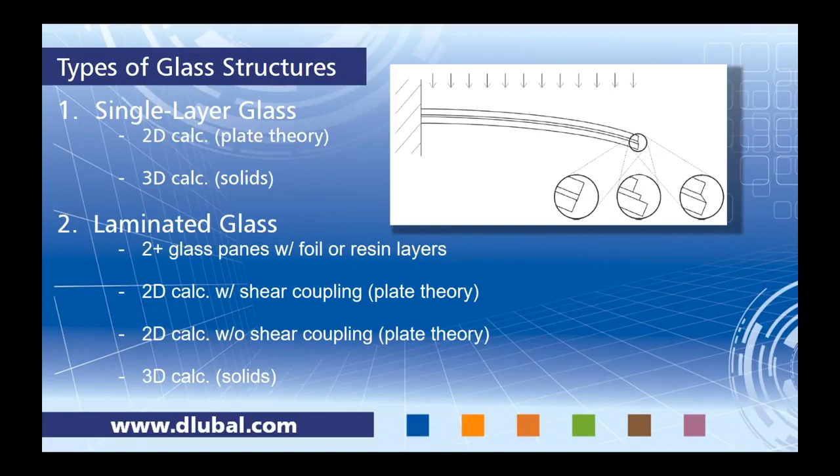The second type of glass is laminated. With laminated, we have two or more glass panes with a foil or resin layer in between. For this option, we also have 2D and 3D calculations available. The first 2D calculation considers shear coupling according to plate theory, and with the shear coupling and the 2D option, we will consider this a rigid shear coupling. You can see that indicated by this picture here, showing the cross-section of the layers and the rigid coupling at the ends. As far as the 2D calculation without shear coupling, this is still according to plate theory, but there will be no relationship in terms of the shear transfer between each of the individual layers, indicated by this second picture here. The third option is with solids. What's nice about this is that we will actually account for the shear stiffness between those intermediate layers to come up with the exact shear transfer between the shear couplings.

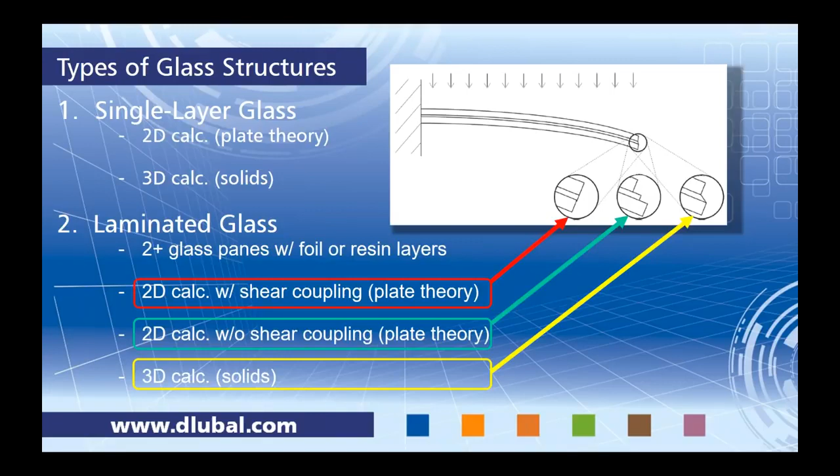When we launch RF Glass, there are two different calculation types we need to choose from: either local or global. Our first example today will utilize a global calculation. This considers the entire model within RFEM, so things like supports, nodal supports, and boundary members are all taken from what we've modeled in the main program RFEM. Now the analysis options for a global model is 2D only, so we can only run this according to plate theory with a linear analysis. Something like insulated glass would not be available for a global calculation.

The other calculation type is local, where we will actually be looking at an individual glass surface only. Things like support types and boundary members have to be redefined within RF Glass, and this provides us with the opportunity to get more detailed when it comes to the support types, where they're exactly framing into the surfaces or solid elements. For local, we also have the ability to run either a 2D or 3D, plate theory or solid, which further allows us to run a linear or large deflection analysis. This will be our second example today, utilizing the local calculation.

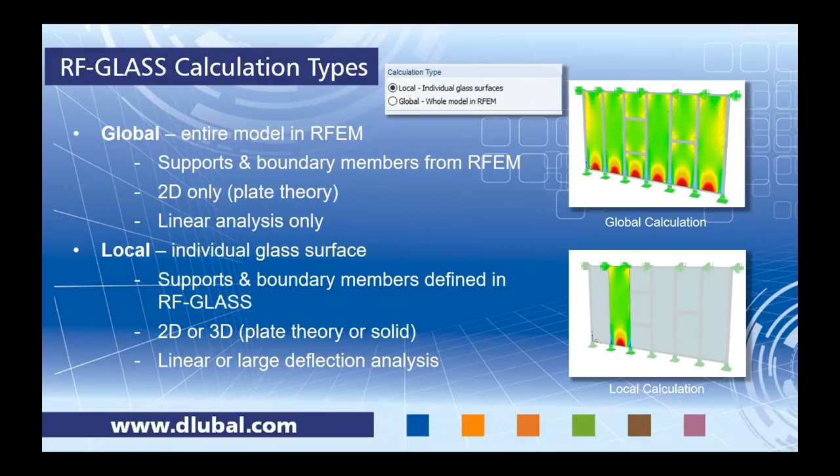I did want to touch upon the NCSEA putting together a new design guide, released this year, called the Engineering Structural Glass Design Guide. To phrase it exactly how they phrase it within the design guide itself, it's to collate relevant design references, requirements, and analysis methods into a single source for easy reference.

I believe that when it comes to glass design within the US, it's a little bit difficult because unless you're an expert, there's really no clear-cut design path to take with glass. So what NCSEA took upon themselves is to compile this document, and it's not very long, to compile maybe some theoretical literature along with what we do know within the US, according to ASTM design guides as well as Eurocode references, so that engineers with not a lot of experience can relate to this design reference. I did want to touch on Chapter 6 with finite element analysis.

This design guide states that, of course, we can always run hand calculations for glass design. But at some point these models may get a little too complex, so that's when we should turn to a finite element analysis software. They also refer to global and local, but this is a little different terminology than what I just discussed with our global versus local.

Okay, so we are finally ready to jump into our first example. It's quite common with glass design that we want to integrate it with our own custom extruded sections. These aren't sections you'd find within the AISC or the ADM, but rather some type of unique cross-section. Within RFEM, you most likely won't have access to quickly define this cross-section without manually calculating all the properties. So we've created a program called SHAPE-THIN.

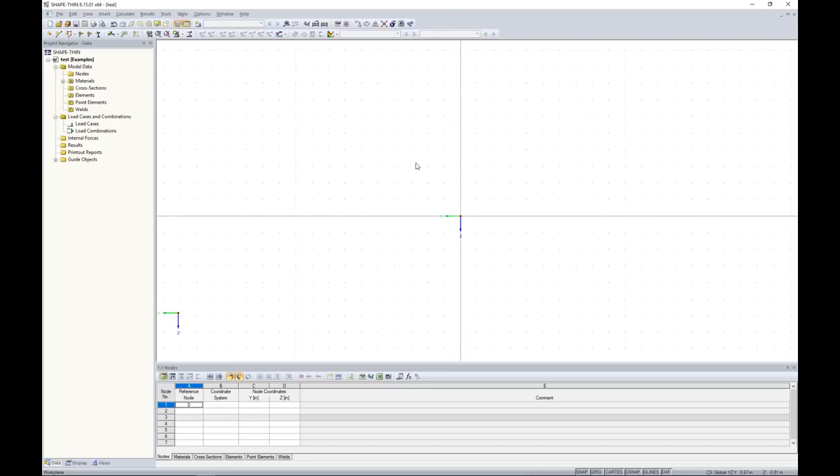For those of you familiar with RFEM, the interface looks almost identical, which is nice for familiarity. What we're going to do today - you can import an AutoCAD file, but today I'm just going to draw my cross-section and have the program calculate the cross-section properties that I can later bring into RFEM.

So we'll start off with a new polyline. With this polyline, I need to define the thickness of my cross section, so we'll set this to something fairly thin at 0.15 inches. As I draw this polyline, I can also take into consideration a bend radius, which you can set here. We'll choose 0.04. The material must also be specified.

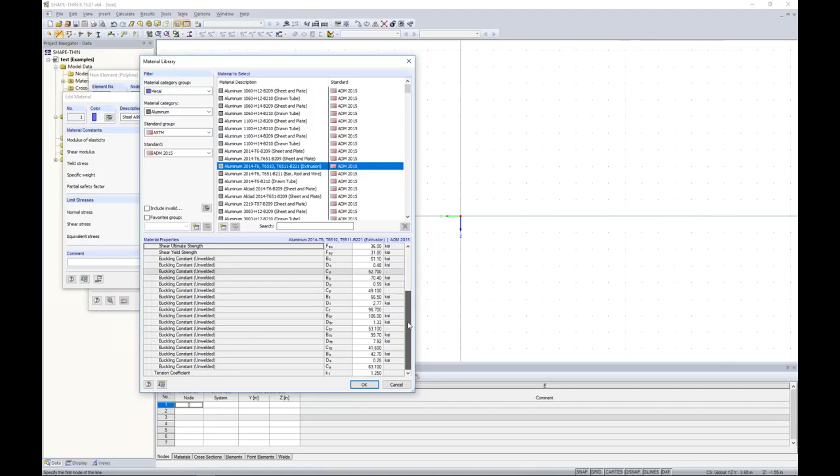Steel A992 is probably default when you first launch the program. We can enter into our material database and use our filters on the left. So instead of steel, maybe we drop down to aluminum, take a look at ASTM, and further filter to the ADM 2015. Now you can see the long list of all the aluminum materials, so most likely you'll find what you need. Today we'll take a look at T6510 for extrusions, and here are all my material properties. I can click OK through these dialog boxes.

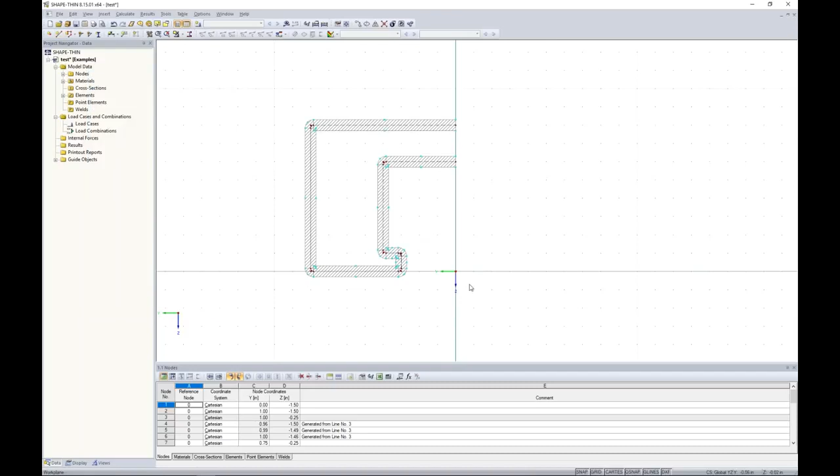So now I'm taking a look at my graphical interface, and I can begin drawing my cross section. All I'm doing is snapping to a few various points on my drawing grid, and you'll notice that bend radius is taken into consideration when I turn these corners. Now I'm only going to draw half of the cross section because I can utilize some of these AutoCAD type features that make our lives a little more efficient.

So I can select the left side of my cross section and use my mirror tool. Up in the tools is the mirror option where I can create a copy and mirror about the origin. I click OK, and just like that, a fairly simple but custom extruded section is created.

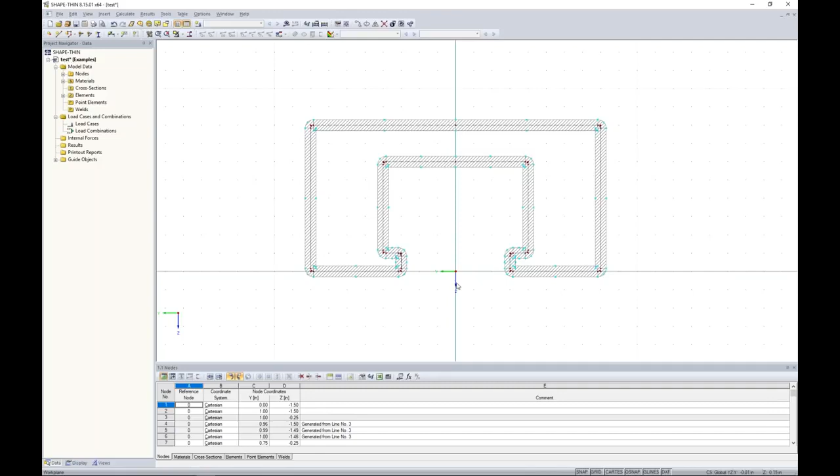I'm almost ready to run the analysis to get my cross-section properties, but I want to jump to materials. For aluminum, you'll notice that the yield strength is automatically set to 0. If I try and solve this, I'll get an error. The reason, if we take a look at the aluminum material, is that there are different yield and ultimate strengths depending on if we're looking at tension, compression, or shear. So the program simply doesn't know what to use when calculating the plastic cross-section properties.

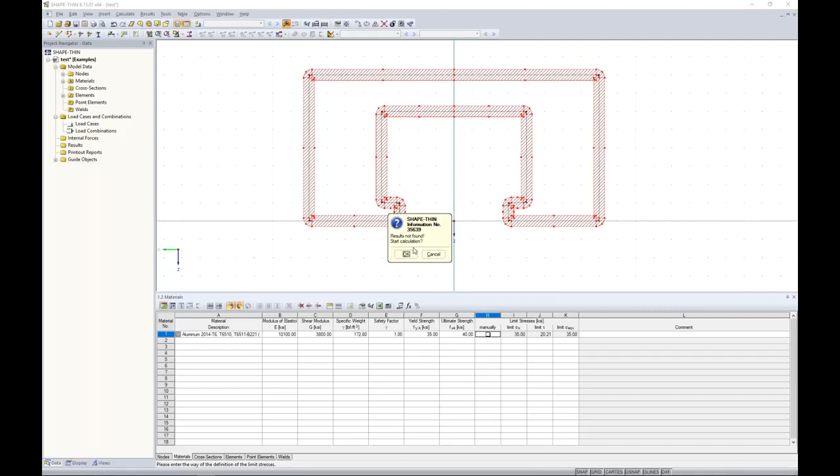So I can realistically set this to whatever, it doesn't matter, 35 and 40. The reason is because I'm going to redefine the material once I get into RFEM. So for now, just as a placeholder, we can now run the calculation with that applicable yield strength set in there. In just a second you can see it solves pretty quick.

Now available in my results table are all of the cross-section properties for this custom cross-section. So we want to save the results, and you have to save the results with these calculated cross-sections in order to integrate it in with RFEM.

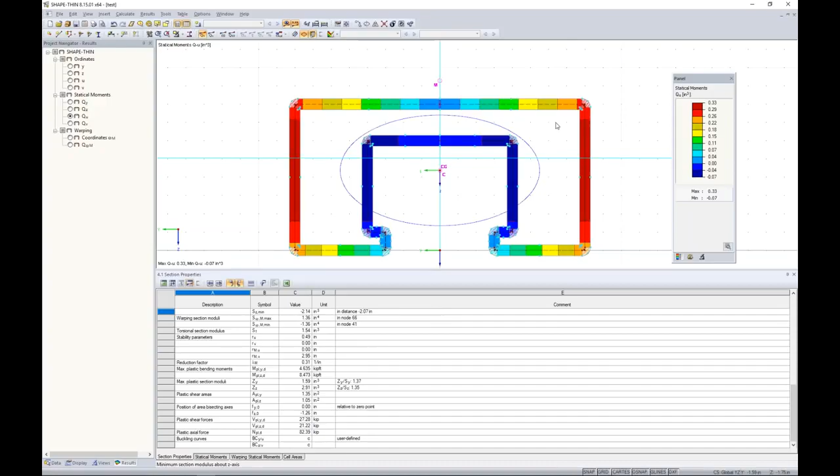So now changing programs here, we'll go over to the program RFEM. To begin with, I need to create a model name. For this one, we can call it webinar. Now, the type of model is 3D.

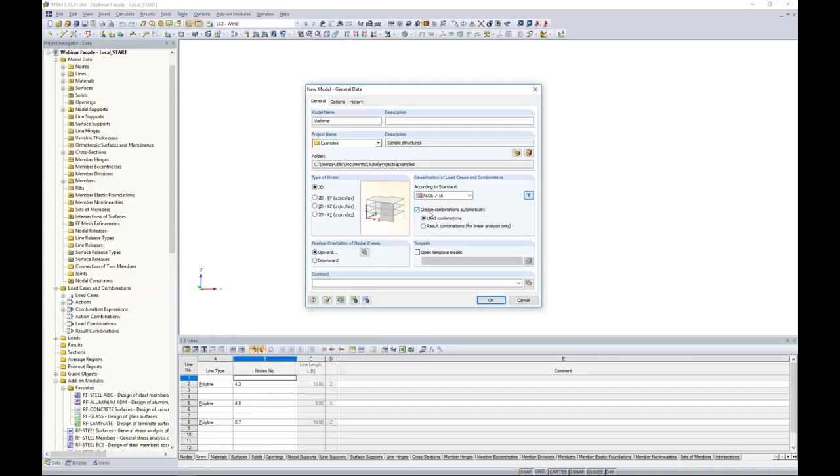The load combinations - this is where we can set the automatic load combination generator according to the ASCE 7 2016. We also have the NBC 2015, as well as many other international standards, including older standards if we hit this button here. When this checkbox is checked, it will automatically create those load combinations. When I uncheck this, that allows me to manually define load combinations. For today, we'll go ahead and utilize the program generating these for us. I click OK, and then up pops my new file.

So here's my graphical interface that we'll utilize to begin modeling our facade wall today. We also have our tables down here at the bottom to work with. You can import and export directly to and from Microsoft Excel. We'll certainly be utilizing these quick tools up at the top.

Over on the left is our project navigator, maybe a little bit more unique to our program RFEM. As we begin to model here, all of our input data will be available in these tree-type lists. The results will also be available here.

So what I'm going to do is change around my drawing grid to begin drawing my facade wall. I want to start off with a new member, so I click on my new member tool. The member type is set to beam, and I'd like to take a look at my cross-section library.

Here are all of my cross-sections available. This would include shapes from the AISC, from the CSA, from the ADM. You also have these parametric thin-walled sections here, but you'll notice that I don't see that custom section that I just created. It's not an option to choose from.

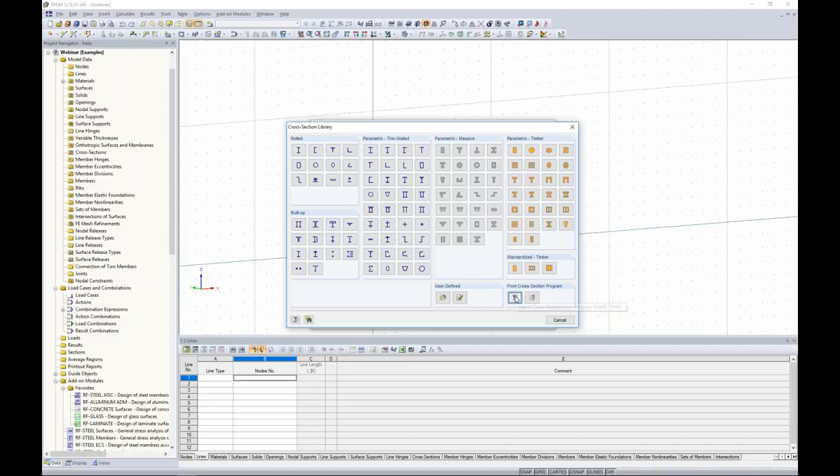So that's why we're choosing this option down here to import the cross-section from Shape Thin. I just simply navigate to where I saved that file, and there's my custom cross-section available to me.

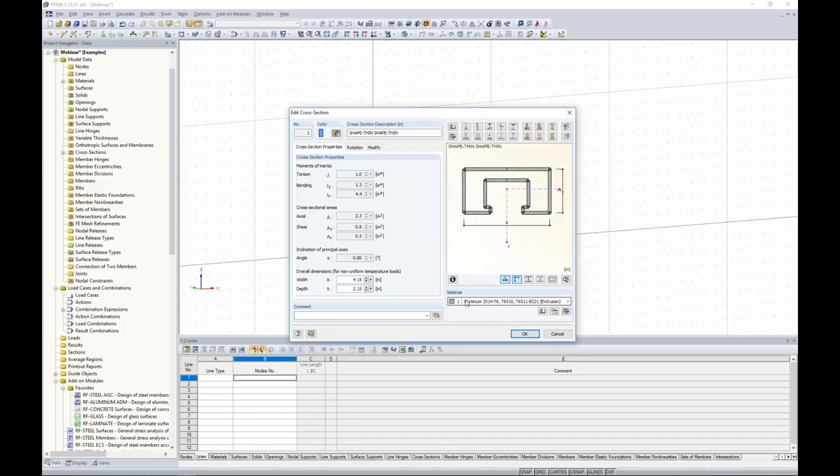So once I load this, I can also modify the material here. Perhaps this was set to steel A992 or whatever default material was in the program. Well, we can quickly access our material database here.

Again, this looks familiar. This looks like exactly what we saw in Shape Thin. We can filter on the left to the ADM 2015 to choose our T6510 for extrusions, and I click OK. So just like that, we now have this custom cross-section available to us within our main program, RFEM.

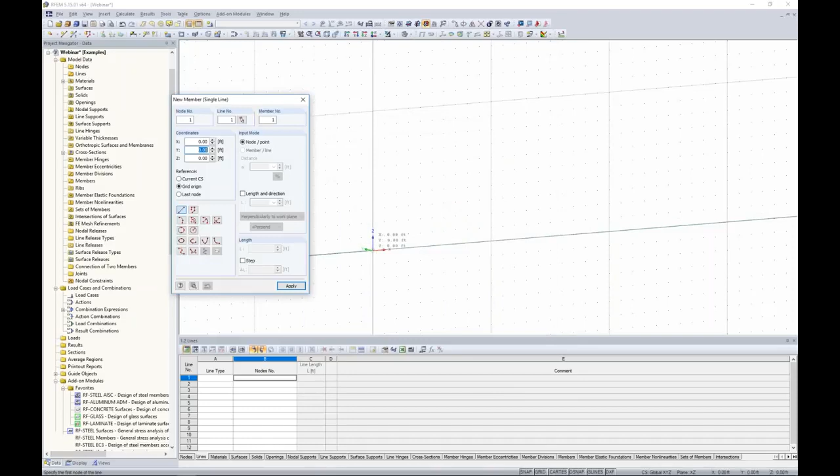So all that I'm doing here is just snapping to a couple points to create my boundary members for my first glass panel. Once I'm done with that, I've created these 4 members, and I want to draw in my glass panel.

Well, we can do this with a new surface element. Up in my quick tools, just like how I drew the beam member, we can draw a surface element. You'll see here we have multiple surface shapes, but for today, we're just going to utilize a typical rectangle shape. Now this is where we choose the stiffness from our drop-down menu set to glass.

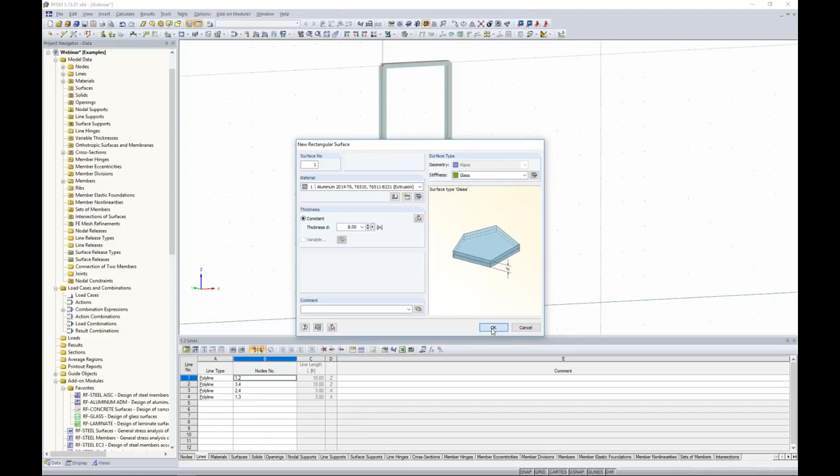As far as the material and thickness, this doesn't matter. We're going to override this in just a little bit of time with the RF Glass add-on module. So aluminum, steel, concrete doesn't matter. Thickness doesn't matter, that's just another placeholder. What we can do is just snap from one corner to the other, and then that 2D surface is drawn for us.

Let's also say that we would like to release the moment of this glass panel framing into these boundary members. Maybe it's not a typical connection type to transfer the moment from this surface element to those boundary members and vice versa. So how do we do this?

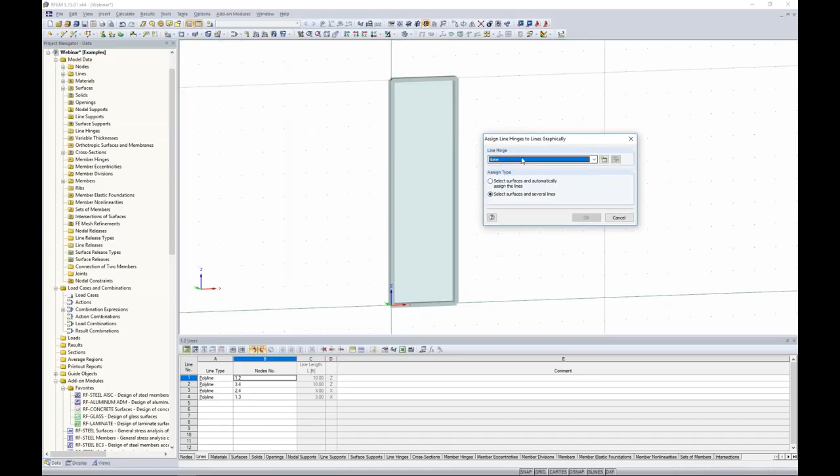Well, under Insert and Model Data, we have the option for what's called line hinges. I can assign to lines graphically, and up pops my dialog box. Right now, I don't have a line hinge definition, it just says none. So what I'd like to do is create a new one.

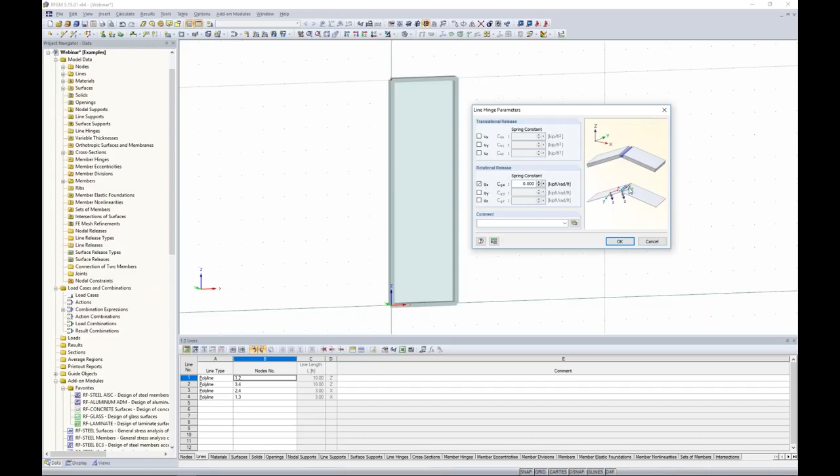So here are my 6 degrees of freedom for my local axes according to my line. Now this is not the local axes of my surface, it's not the local axes of that beam, but it's actually the shared line that they have in common. So what I want to do here is release the moment about the local x-axis of the line, which is along the line length, and I click OK.

So now I can select this surface and then easily click on the 4 line elements on the boundaries, click OK, and now we can see the line hinge shown here with this available symbol.

I am going to select everything here, just like what I would do in AutoCAD, for example, and use my Move Copy tool. I'm going to create 5 copies in the displacement vector of 3 feet in the global X direction. I click OK, and now it copied over the line hinges, the boundary members, and these surfaces.

Well, I've decided that for this 3rd panel and this 5th panel, if I hold down my Control key, highlight them, and I hit Delete on my keyboard, I want to subdivide these into smaller glass panels.

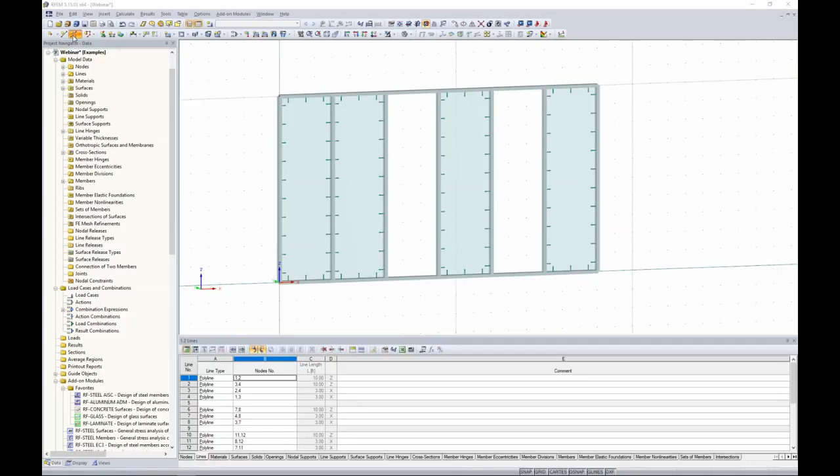Well, for this, I want to draw a new member again. Now, my Shape Thin section, along with my material aluminum, has already been set. I don't need to redefine that, so I'm utilizing the same shape and the same material. All I need to do is click OK, and then I can begin modeling here to create some smaller glass panels.

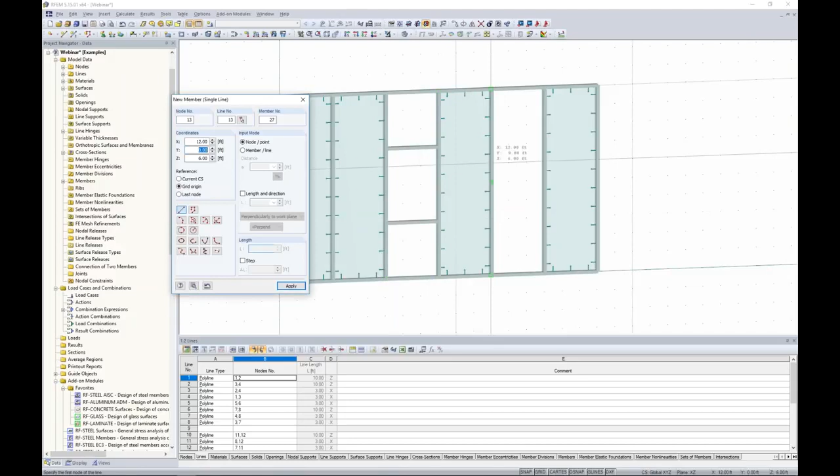And we'll go do the same over here, but we'll just subdivide this one in half, and I can right click. Now I'm going to utilize this tool up here to connect all of my lines, and that just creates a node here and separates these members.

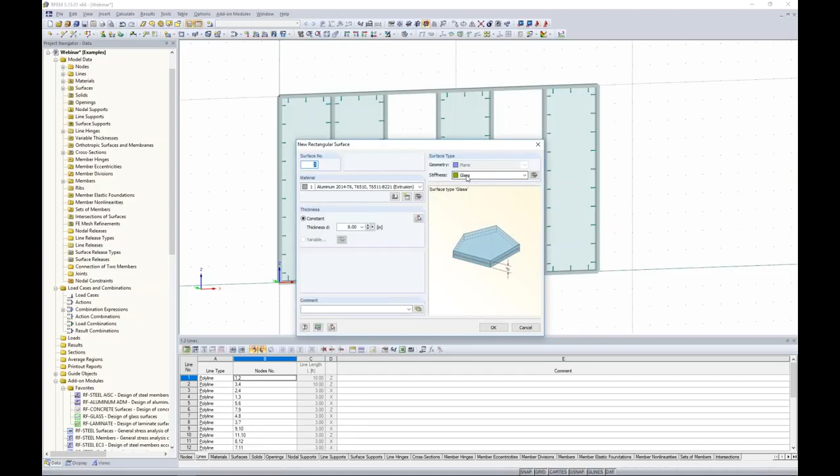Now you'll notice that I obviously lost my glass surfaces, so we want to go back to draw a new rectangular surface, set the stiffness to glass. Remember, the material and thickness don't matter at this point, we're just really defining the geometry at this point. So snapping from one corner to the other, I can quickly take into consideration these smaller glass elements.

Now I've also lost my line hinges. So under Insert, Model Data, Line Hinges, assigned to lines graphically. We've already defined the type, I don't need to redefine that. All I want to do now is to select this glass panel and select the 4 boundary members.

And I need to do the same thing for all of these new glass surfaces. So you can see the benefit here of utilizing that Move Copy tool so that we don't need to individually apply these line hinges to each surface like we're doing now for these smaller segments. So we'll go ahead and do the same thing for the 5th panel point location, and finally for our smaller panel here, we are done.

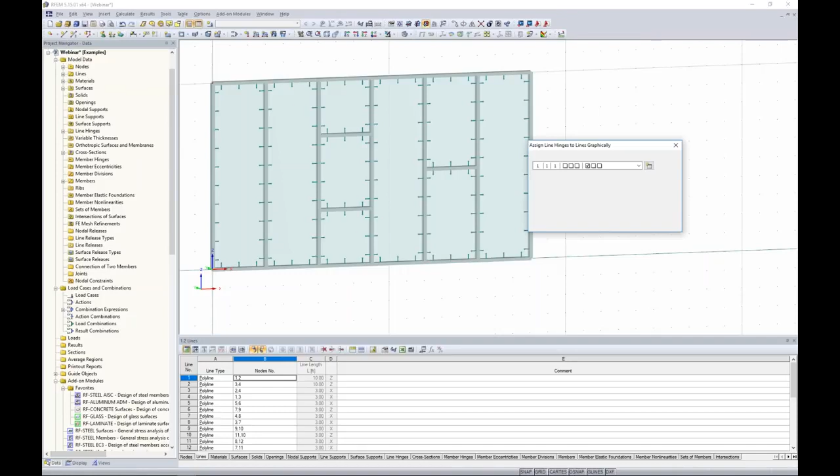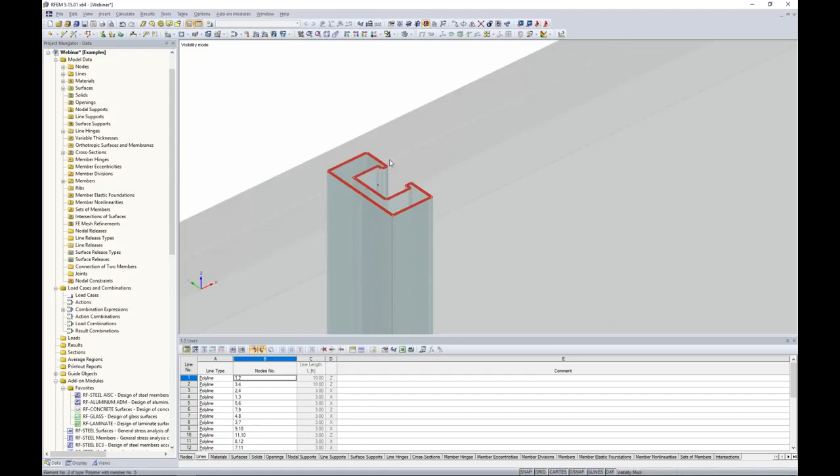Okay, so the geometry is pretty much accounted for, but there's one thing I'd like to adjust. If we take a look at this member here and I choose a visibility by selected objects and I zoom in here, well, number one, you'll notice I get a great rendered shape here of my cross section. Although it's custom and we might have some different lips and extrusions and whatever else, you'll always get a nice rendered view, so I know exactly where the orientation of my members are.

Well, for these internal members, I actually want to rotate them 90 degrees. Maybe that's just the type of connection for this facade wall. So canceling out this visibility and rotating this around, let's turn this into wireframe view, and I'm going to select all of my internal members here. So I didn't select the outside boundary members, I just simply double click on one of the members, and then right away I can adjust the angle to 90 degrees and I click OK. So now when I turn back on the rendered view, all of these internal members are now facing towards the global y-axis.

So we would like to support this wall. How we'll do so is with nodal supports, and again, it's just a simple tool up here, a new nodal support. Now we have a couple default options here, hinge, which is a typical pin nodal support, and rigid, which is fully fixed nodal support. So for the bottom of the wall, let's just utilize a simple pinned application. I click OK. I just highlight along the bottom of my wall here, and I lost it, so 1 second. I highlight the bottom of my wall, and now that pin support will be applied to every node along the bottom.

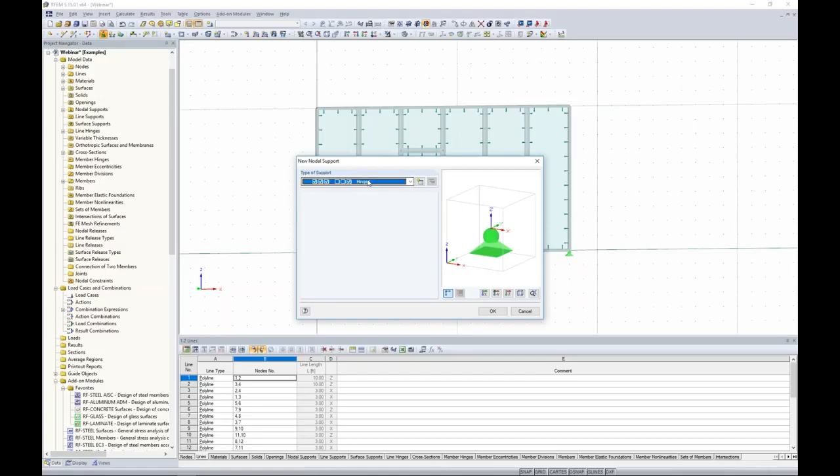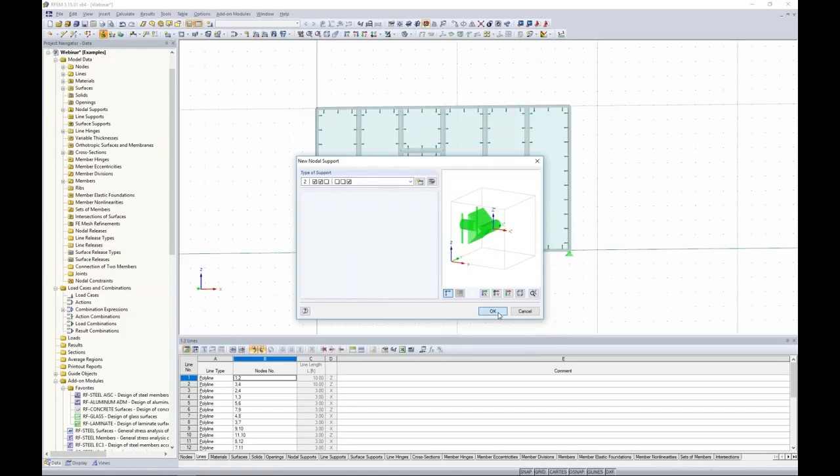As for the top, I also want to apply a nodal support, but this time I don't want to use one of these default options. I'm going to create my own nodal support. Here are my 6 degrees of freedom, 3 degrees in translation, 3 degrees in rotation. I'm going to release translation in the Z direction, so I want this wall to have a roller type support in the vertical direction. I click OK, so now I have this user-defined type of support. I click OK, and I can highlight the top of my wall here.

So realistically, the modeling of the wall itself is complete. So we want to move on to applying a couple loads to this wall. For this, we need to first define our load cases. So another button up here in our toolbar called New Load Case, and up pops my Edit Load Cases and Combinations.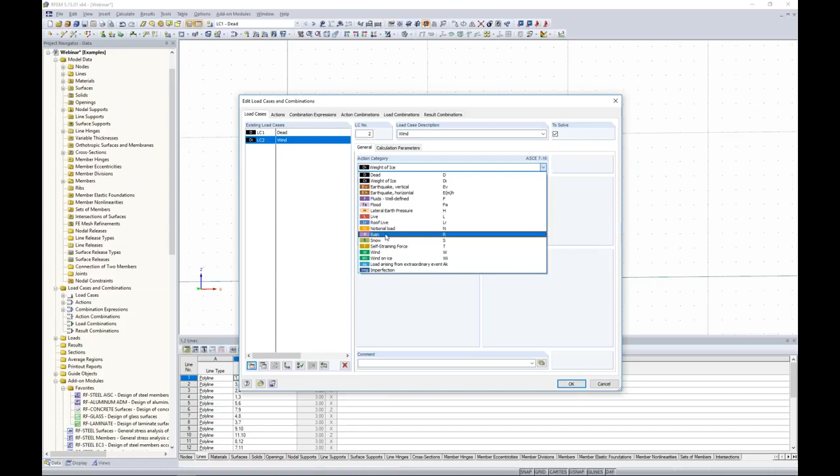The first load case is going to be dead load. Now the action category is important because this tells the program what load factors should I apply according to the ASCE 7. So this one will be according to the dead load, and self-weight is automatically activated here. For my second load case, we will call this one wind. The action category will be set to wind. Self-weight is not activated here because we don't want to account for it twice.

The combination expressions tab is the program telling me it's going to generate all the LRFD load combinations and all of the ASD load combinations. To see these individually listed out, let's go to the load combinations tab, and here are my 3 LRFD load combinations and my 3 ASD load combinations.

This is a fairly short list because we only have 2 different load cases defined. So once I'm done setting up my load cases and load combinations, I need to actually apply a load to this wall. To apply a load, we can see these load cases and load combinations generated for us here.

Let's make sure we're in the LC1 dead load. For dead load, I'm going to make the assumption that I only want to apply self-weight here. Remember, that's already accounted for within the load case itself, so I don't need to do anything further.

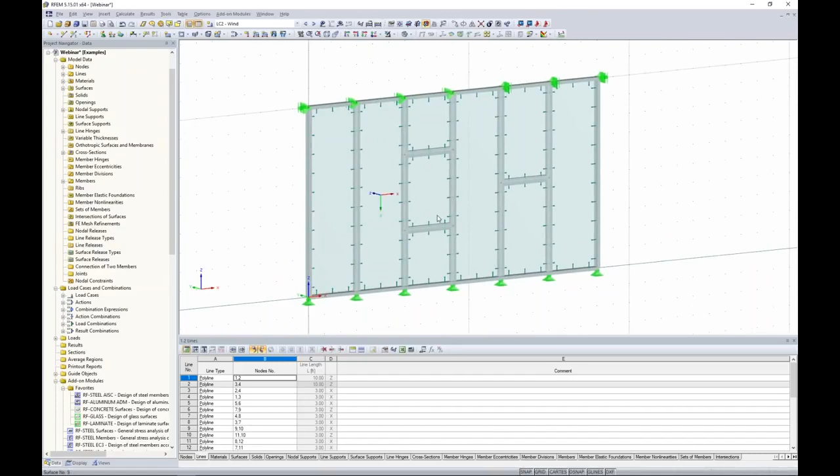As for wind load, I scroll to wind load, and I want some type of surface wind load acting on the face of this wall. So I'm going to go to a new surface load, apply a force, and the load direction is going to be in the global Y direction. You can see here my global axes, and I want this load acting on the face of this wall. The load distribution is going to vary in the vertical direction.

What do I mean by that? At the top of the wall, I would like the magnitude to be something around 25 PSF, but at the bottom, let's decrease that slightly to around 20 PSF.

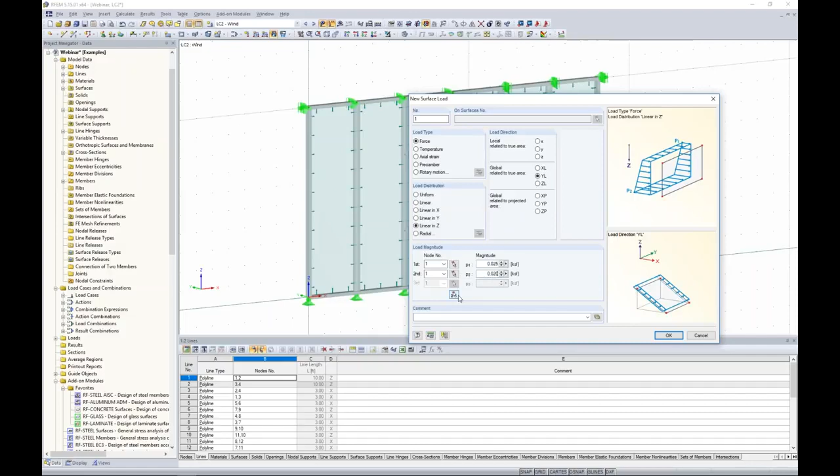The thing that I do need to define is to tell the program what's the top of the wall, what's the bottom of the wall, and how I want to vary this. That's easy enough to do by just choosing any arbitrary point first at the top of the wall and a second point at the bottom of the wall. Now the program knows what magnitudes to associate at which points.

I click OK, and then I just simply highlight my entire wall. And just like that, we have our wind load applied to the surface here, which is varying in the Z direction. So pretty simple for our loads being applied today.

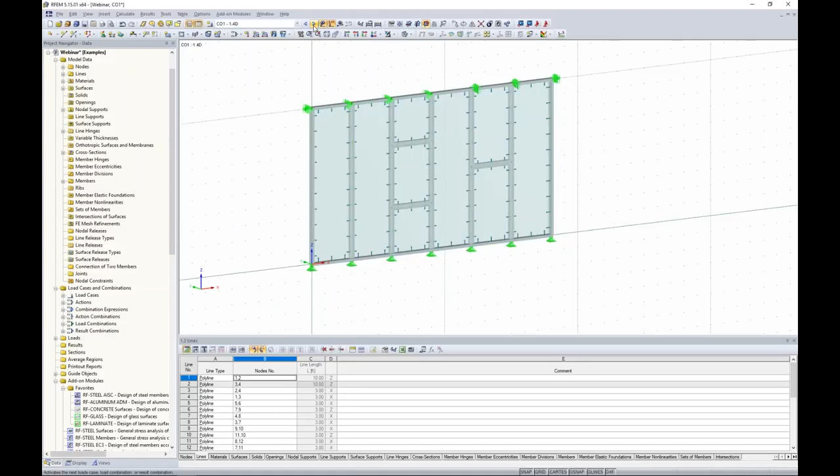We can see the load combinations here with the load factors applied for dead load and wind load and so on. So one final thing to do before we jump to the RF glass add-on module, and that's to take a look at our finite element mesh.

Well, these are surface elements, so we want to take a look at the FE mesh settings to make sure we're going to get accurate results. Under Calculate FE mesh settings, the global FE mesh length is always set to 1 foot for a new file or a new model within RFEM. Let's leave it as the default, and here I'm going to regenerate the FE mesh once I click OK.

I can see here that my FE mesh is a little bit too large. I only have 3 FE mesh points along the width of these glass panels. This really just isn't ideal to give us accurate results, so it's always suggested that we go smaller than this. This will increase our solution time slightly, but in turn, of course, we need to see accurate results.

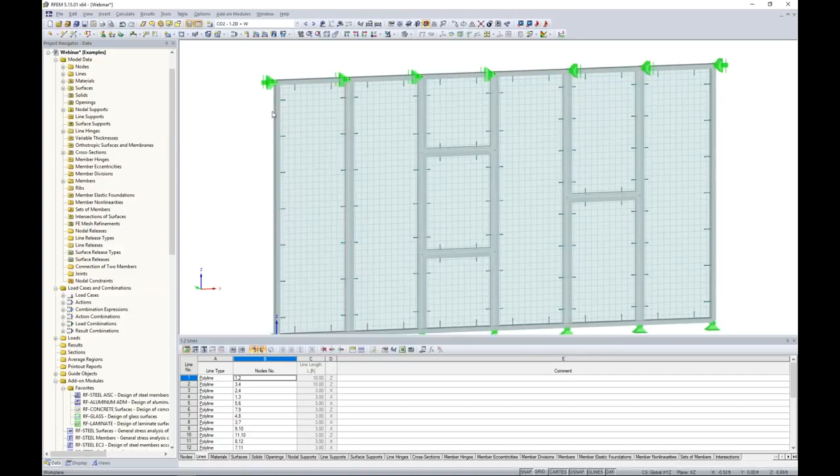So under Calculate FE mesh settings, let's try something like 0.25 feet, and we can regenerate this again. This looks much better, and I know that's a little difficult to see, but maybe we turn this into wireframe view. We can see the FE mesh settings along the width is much smaller, so that looks much better.

Okay, so the geometry, the loading, the FE mesh, everything's done, but remember we still have these glass surfaces here. So this is where I want to launch the add-on module RF glass. Everything you've seen up until now was in our main program, RFEM.

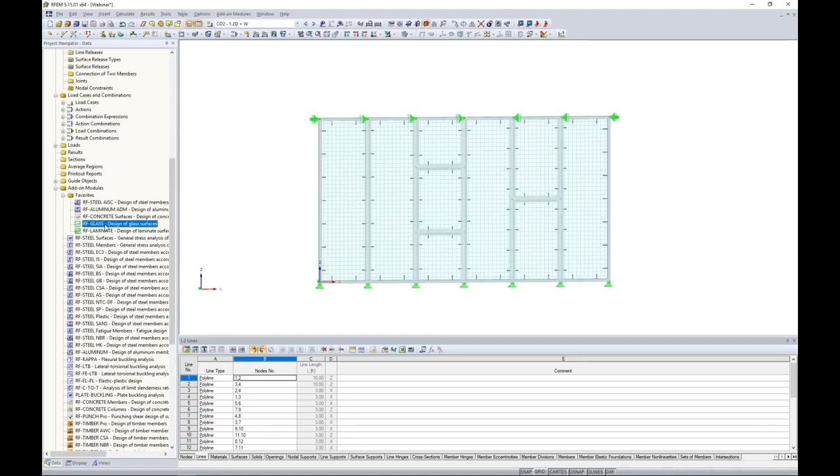In our project navigator, here is our long list of add-on modules, and as you can see, RF glass is one of them. So we can launch this add-on module, and up pops nothing more than a dialog box. As I mentioned within the PowerPoint, we need to first choose the calculation type, and for this, our first example, we're going to utilize the global calculation.

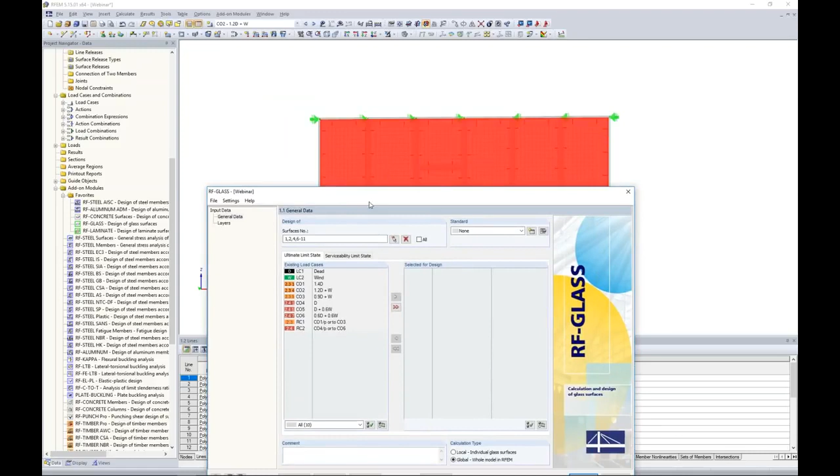The standard is set to none because we're just doing a stress analysis and design. These surfaces that we're designing for, you can see they're all highlighted here because they're all being selected for design, but by all means, you don't need to choose every surface if you're not interested in it.

For the ultimate limit state design, we'll choose our 3 LRFD load combinations, and for our serviceability, we're choosing our 3 ASD load combinations. As I mentioned, we can also check deflections.

Then it's as simple as just working down this list from top to bottom. So we move on to the layers, where we define our different glass layers. The first thing to do is to select the surfaces that this first composition will apply to, so I can highlight them all, and you can also create more than one composition.

So maybe for these smaller panels, I wanted to use a thinner glass. You could certainly do so all within the same model by assigning different surfaces to different compositions.

So we're going to utilize laminated glass. The first layer type is going to be glass, and here is where we would access our material library.

Typically when you launch this for the first time, you're really only going to see a very small amount of materials that aren't really relevant for the ASTM or the US market. So this is why we give you the opportunity to define your own. For me, I've created a thermally toughened float glass and placed it in what I call an ASTM glass standard. So depending on the manufacturer, or if you're going off of the ASTM standards, you would simply add that material here with this option to create a new material, put in your material properties, and that will always be available for all file types when you're modeling in RFEM.

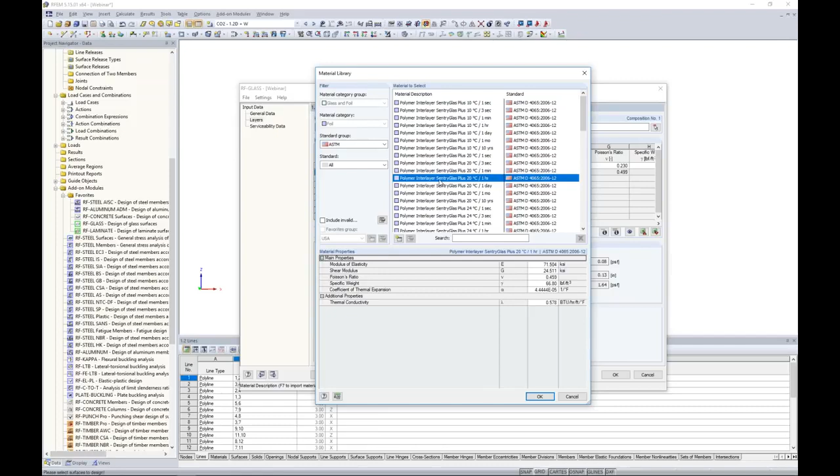The second layer is foil. When we go to the material library for glass and foil, we can see here that we have some options that are not related to any standard, like PVB would be a common interlayer, for example. We do have a manufacturer here for SentryGlas according to the ASTM, and by all means, you can always add your own interlayers as well, whether that's a foil, a resin, PVB, and so on. So for today, we're going to utilize SentryGlas at 20 degrees Celsius. I click OK, and the thickness is much smaller at 0.01 inches.

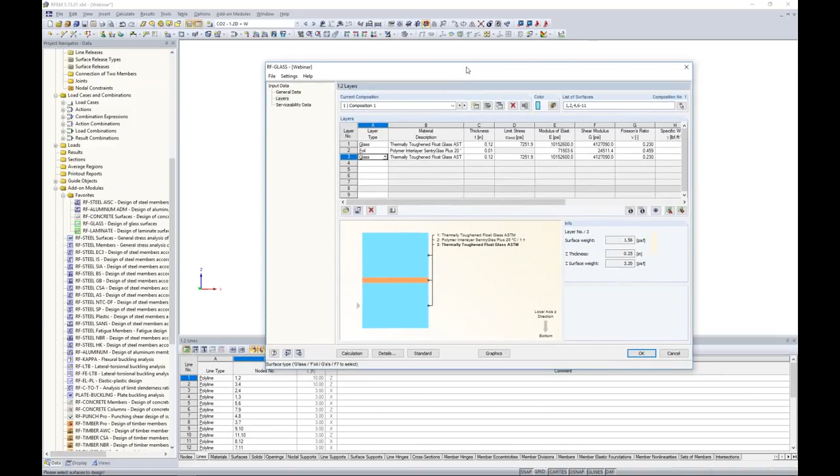The final layer for our laminated glass panel is going to be glass. The program makes the assumption you want to use the same thickness, and that's fine. You'll notice here a graphical representation of my layers, and here is a note showing you what the local z-axis direction is according to these surfaces. So it's very important that you pay attention to the orientation of your local axes of your surfaces to make sure you've defined your layers correctly. Now in this case it's completely symmetrical, so it's not so important, but in our next example we'll see where it does become a little bit more important.

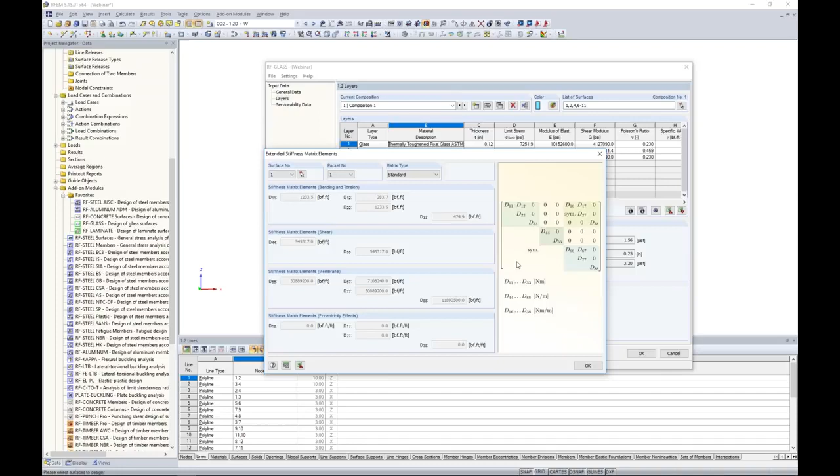You can save these compositions, by the way, and pull them up for any future models into a library. So what's happening behind the scenes? For each individual layer, I can take a look at the stiffness matrix for that single layer. What the program is doing in this module is taking into consideration all of these layers I've just defined, and it's creating a global stiffness matrix, which we can actually view here within this add-on module. This global stiffness matrix is then exported back out to RFEM, and we rerun the analysis with the correct material stiffness matrix to ultimately get our results back into this module. So that's kind of what's going on behind the scenes.

Now, one last thing to look at here is edit composition details. Well, the only details we really have here aren't too much. We can either consider coupling—remember, according to 2D plate theory from the PowerPoint, when we consider coupling, it's a fully rigid shear coupling. When I uncheck this, then we don't have any shear coupling between any of the layers at all. So for today, we'll keep this as a rigid shear coupling.

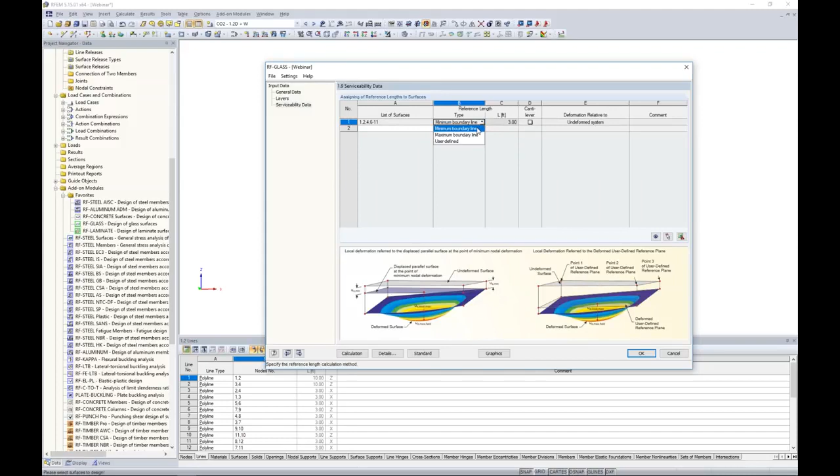And finally, we jump down to serviceability data. We can also design the serviceability checks here, so we can select all surfaces that we're interested in for the deflection. The reference length is the length that's going to be used in our limiting deflection ratios. The program has a few defaults here: the minimum boundary line, the maximum boundary line, or you can type in your own length definition. For today, maybe I use the maximum boundary line of 10 feet, which is the total height of the wall.

Is the deformation related to the undeformed system, or is it a displaced parallel surface? Basically, is this absolute or relative that we're supposed to be measuring these deflections from? Today we'll keep this according to the undeformed system, and these pictures show down here exactly where the deflections will be measured from. You can also set if this is a cantilever surface as well. So the question is, we've defined all this information, but what's my limiting deflection ratio?

That's controlled under the standard button. We can see here for this first line, because we only have characteristic load combinations for ASD back on the general data tab, the deflection limit by default is set to L over 100 for simply supported, L over 50 for cantilevers. Glass is obviously a little bit more sensitive to deflection than what we'd see with a steel beam, which might be more like L over 300. So by all means, you as the user can control what these limiting deflection limits are.

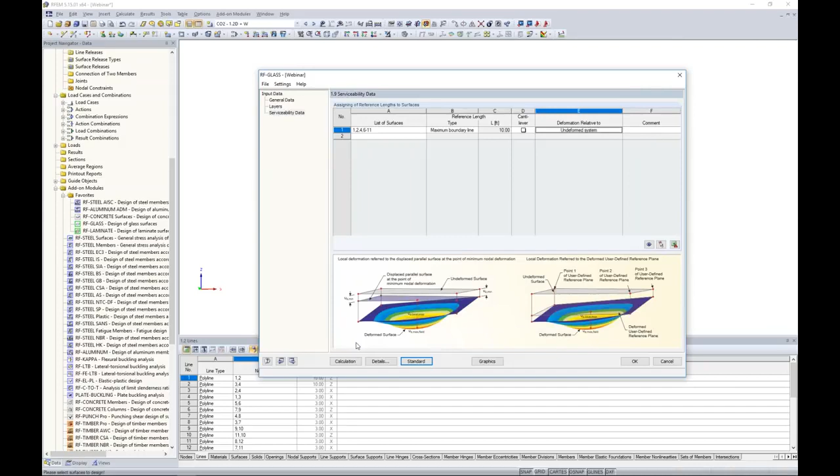And just like that, we're finally ready to run our calculation. Now, this takes a split second, and that's because it's a linear static analysis. We're just exporting out that global stiffness matrix, and then we're bringing back in the results into RF glass.

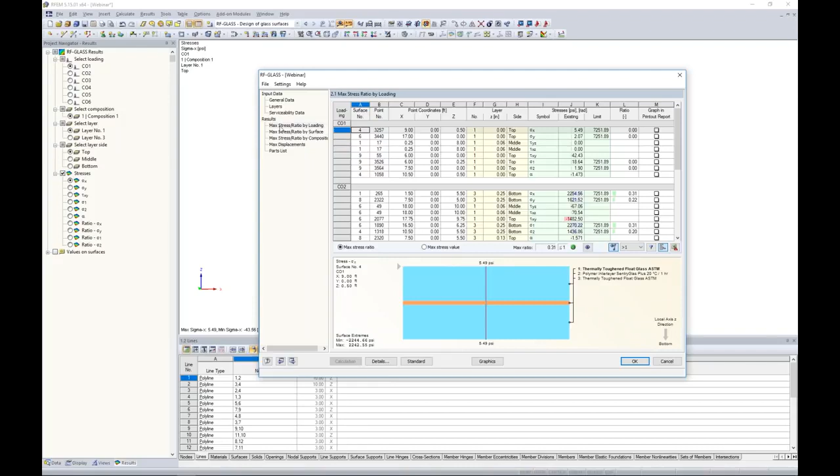So once it's done with the calculation, our results are presented to us in this table format. We can view the max stress ratio by loading, by surface, so we should have all of our surfaces shown here, and by composition. So when we're looking at this table, this is the max stress ratio by surface, you'll notice that as I'm scrolling through my table to different values, the program is highlighting in the background exactly which surface I'm looking at.

From there, we can take a look at our normal stresses within the local XY axis, our shear stresses, our normal principal stresses as well. And ultimately, we're seeing the required stresses based on the analysis, as well as our limiting stresses, which is just based off of our materials, and finally a ratio check for our stress design.

The program gives you the summary here. Out of all these surfaces, the max ratio is 0.31, so relatively low. And we have our nice green smiley face here because he's less than 1.0. If you're seeing a red sad face there, then you know that you probably are a little overstressed and you're over 1.0.

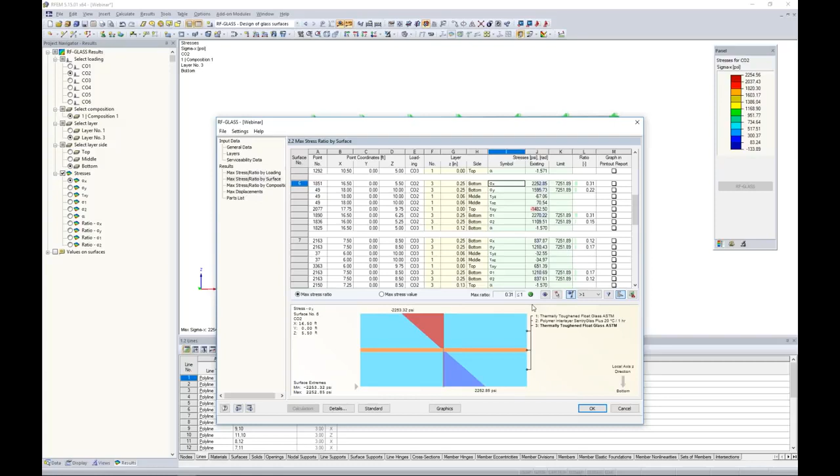The max displacements, this is our serviceability check. So we can see the displacements based on the analysis. We see our limiting displacements based on that L over 100 ratio. And then we have a serviceability ratio given to us, with the controlling one being 0.61 along with our green smiley face.

So remember, for any of these tables, you can export directly to Microsoft Excel for further sorting. Obviously Microsoft Excel is going to have much more capabilities when it comes to that. The parts list is also given here, which is a material takeoff, so we will also give you that information.

Now, the tables are nice, but it's also beneficial to jump to our graphics view. So with our graphics view, we are technically still within this add-on module. You can see it here from our drop-down RF glass, but we're viewing all of our results graphically back within RFEM. And now our results tables are presented to us here under the Project Navigator.

We see our loading combinations. From here, we can view the two different glass layers. Remember, we have one on the inside and one on the outside. And even furthermore, you can view the top, the middle, or the bottom stresses for each layer. From here, the stresses are given to you that you can scroll through, whether that's shear stresses, or maybe you want to take a look at ratios here for however the stress checks come out. And that's all available to add to your printout reports.

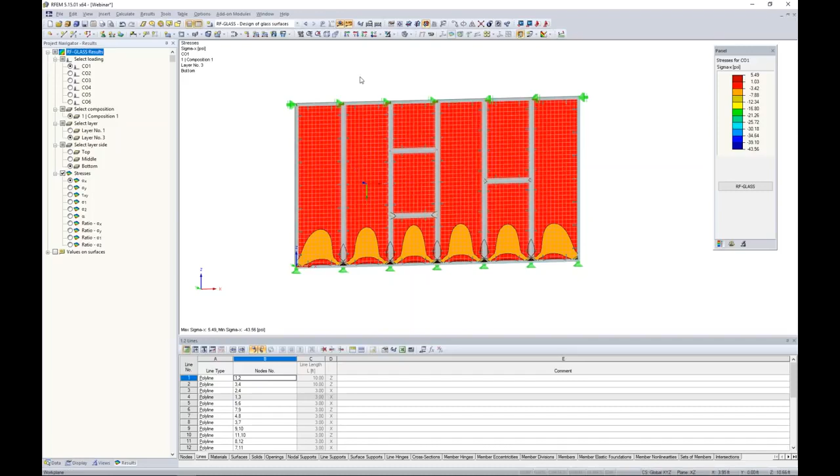So we're going to take one of these panels, and what I did under a different file here is I've just simplified it. I took one of those glass panels, kept the supports, kept the boundary members, and even kept these same wind loads the same.

And for the second example today, utilizing insulated glass, we want to launch RF Glass again. Now, when we launch this add-on module, the calculation type here will now be set to local. The standard is still set to none. The surfaces that I want to design, well, we only have one surface here, so let's move forward with this one.

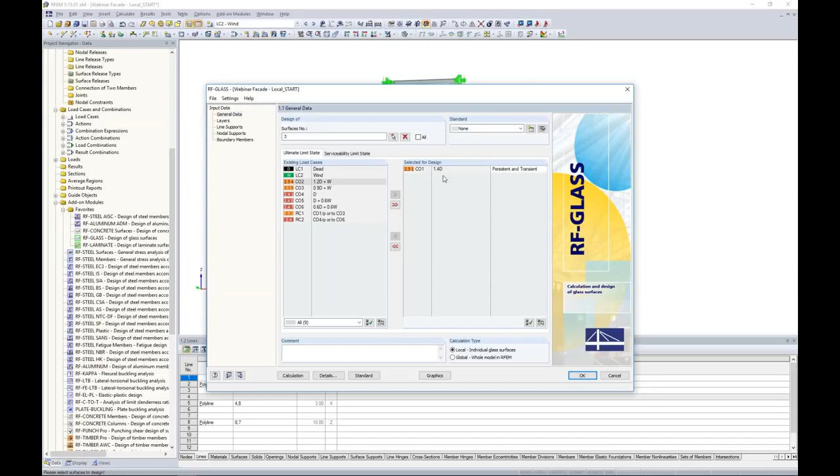As far as the load combinations, I'm actually going to come back to this. Right now, I'm just going to put a simple placeholder in for my LRFD design. The reason why is we're going to make some adjustments here with climatic loads later on. So in just a minute, we'll get back to this.

In the meantime, we simply move up or down our list over here, and you'll notice a few more tables are available now. So the first thing for our layers, and this should look familiar, we want to select our surface here, surface number 3. The layer type is going to be glass, and I still have my thermally toughened float glass from the ASTM with a thickness of 0.22.

The next layer is going to be gas, and this is where we can utilize our material library here. We have a few gases implemented. Again, you can always add your own gas. For today, we're going to utilize argon with the gas properties given here.

The third layer is going to be glass as well at 0.22 inches. The fourth layer is going to be my foil. And again, I'm going to go back to my material library here, and I'm going to choose that SentryGlas for 20 degrees Celsius. I click OK. The thickness is 0.01 inches, and my final fifth layer is going to be glass again at 0.22 inches.

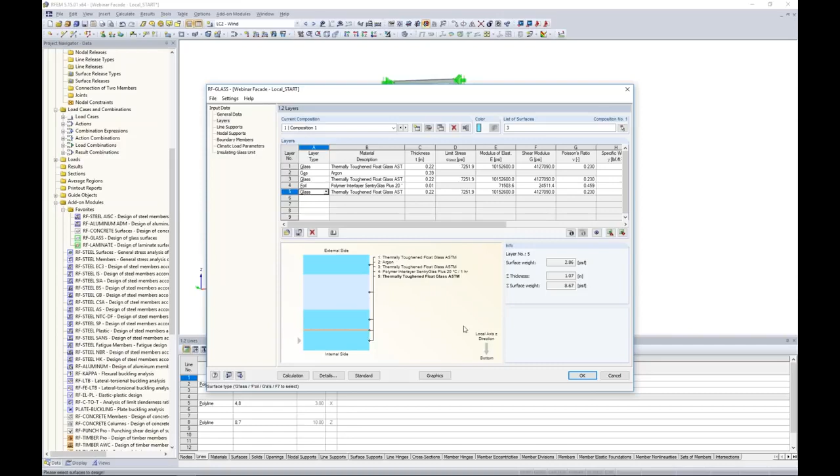So there are my 5 layers. Now you can see again the profile here of our different layers, and this is why it's incredibly important to pay careful attention to your local z-axis. Even more so with insulated glass, the program has to determine what's the external side and what's the internal side.

So if these don't match up to what you'd like to see, in our case, we want the gas closest to the external side, then you need to make some adjustments here with your layers to make sure that those match up.

Let's take a look at the composition details. So this is quite a bit more information than what we saw with our last example. Remember, we only had shear coupling to consider here. Well, now you can see the method of analysis is automatically set to a large deformation analysis.

And this is because we have introduced a gas layer into these glass surfaces. And we run this according to a Newton-Raphson. The modeling of the laminated glass — so this is interesting here.

This will also be a 3D calculation utilizing solid elements. So by the way, in the background, once we run an analysis, that 3D model is going to be created with solid elements instead of surface elements. So what we can do here to consider coupling, we also have to utilize 3D elements for the laminated portion of our glass.

But if I uncheck the coupling, then it will automatically use plate theory for the laminated portion of my glass here. Today, we're going to consider coupling and just utilize solid elements throughout the entire surface of this glass panel.

Save created temporary models — so I just mentioned that in the background, the program is going to regenerate this entire RFEM model. And instead of 2D surface elements, it's going to create 3D solid elements. That's all going to go on behind the scenes, but you do have the ability to save that created temporary model and to actually pull it up like you would any other RFEM model. I'll actually check this here and I'll show you what one of those looks like.

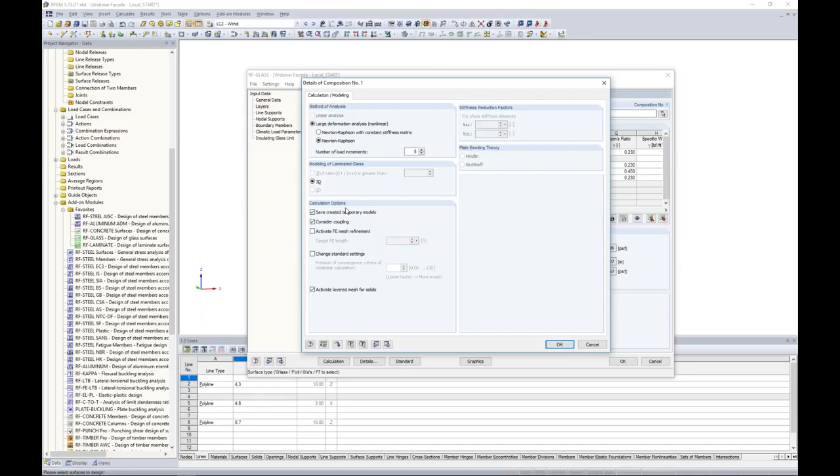Then we just have some further FE mesh refinements here, and we can click OK. So line supports and nodal supports.

You remember from the PowerPoint, I said that you have to redefine your support types with a local calculation. Now the program does this, so technically these support types shown in RFEM now will be completely ignored. That's why we need to redefine it here. But the program is smart enough to make an attempt at defining what you already have drawn in the RFEM model. As you can see here, my 2 support types are shown, and the program has some support type defaults here.

Now, these support type defaults, if you want to find out more information, you can click on any of them and you can see our 6 degrees of freedom here and how exactly the program is supporting each glass layer. Remember, we have 3 glass layers for this insulated panel, so the program will support as such. If you want more information, our help file under this question mark in the corner explains a little bit more clearly what's going on.

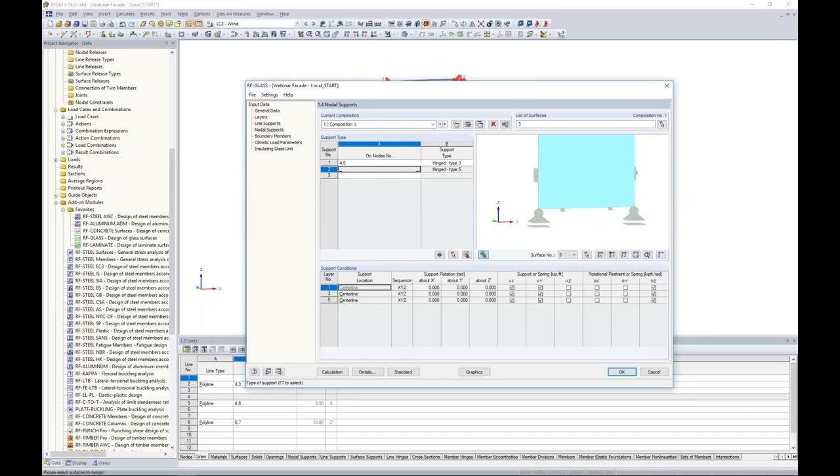Now, in our case today, I don't really like what the program is suggesting. So instead, I'm going to individually define my support types. The first one will be node number 4, which is my lower node here. Instead of hinge type 3, I'm going to choose user defined. Now when I scroll in here, we can see our different glass layers along with our gas right here, but I can only support the glass. So for my middle layer of glass, I'm going to set this to none.

I'm only going to support layer number 1 and layer number 5 at the center line, and I'm going to apply a basic pin support at these locations.

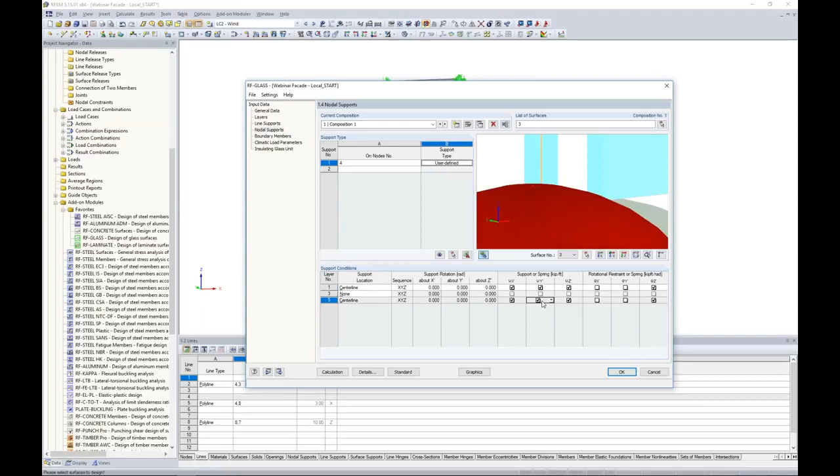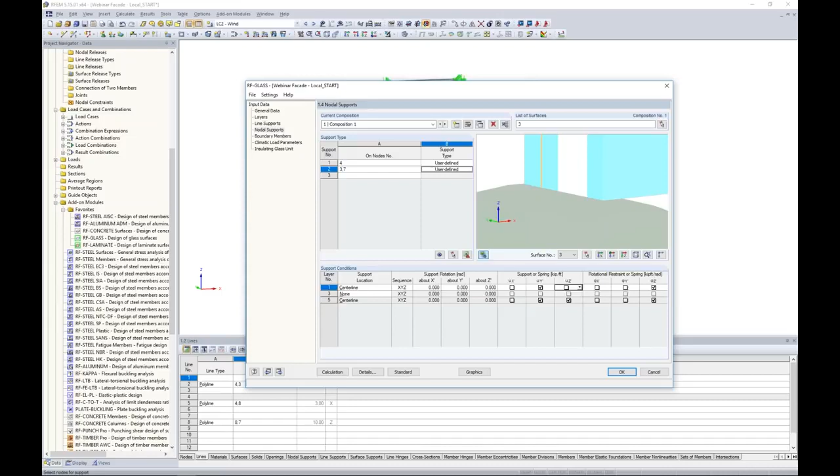Now, let's go ahead and graphically select a couple different nodes here. We're going to select the upper 2 nodes, and this will also be user defined. I'm going to not support the center layer, and as far as layer number 1 and layer number 5, I'm going to release the X and the Z here. So now we have some type of roller support, and I can zoom up here to see these nodal supports being applied up here to the top. They're a little large, but essentially you get the picture. It's being applied to those different glass layers.

And finally, we have one more node to define, and that's in the lower right corner. I click OK. Again, we can zoom out here to view that in the smaller picture, and we can zoom in. Now for this same concept, we're going to go to user defined. We're not going to support the center layer. The 2 outer layers remain a pin support, but I want to have sliding in the X direction. So now I have manually defined these support conditions.

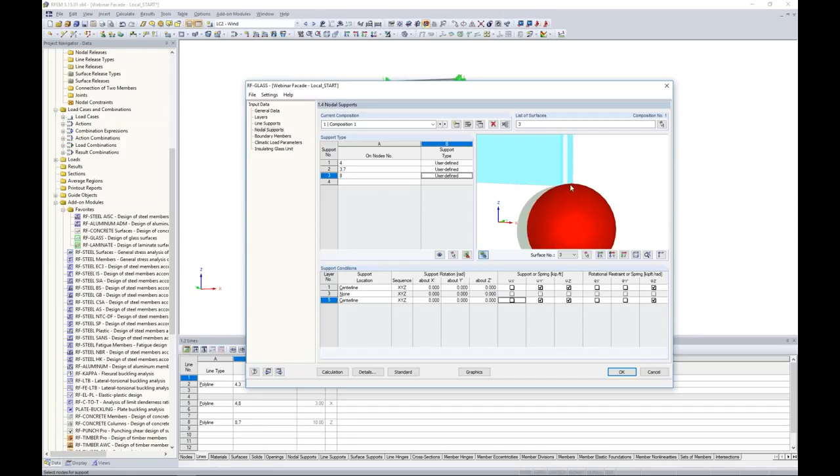So you can see a huge difference here of utilizing those 3D solid elements and how much more detailed you can get with your support types.

Now, the boundary members, same concept as our support conditions. If I zoom in here, here is my custom cross-section from Shape Thin. But I need to tell the program where exactly to apply these boundary members. How do they frame into these glass panels? Well, again, the program makes some suggestions here. The program notices, hey, I see boundary members in RFEM. Let me go ahead and attempt to put them into this glass module as well.

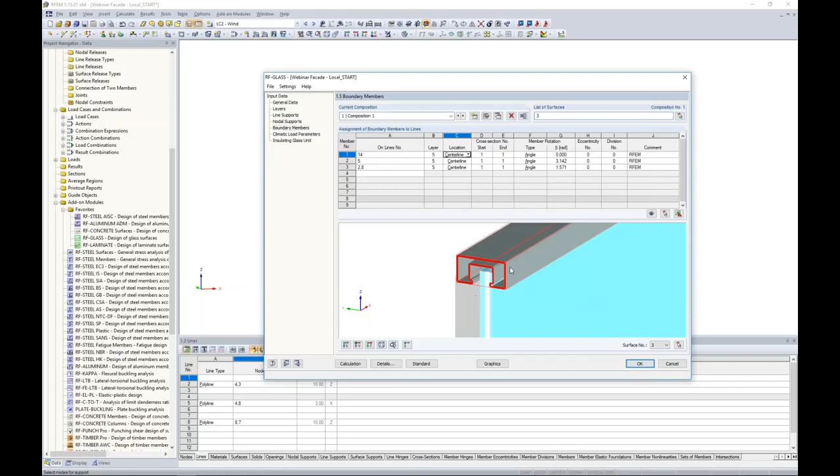Well, this is where you can see we have glass layers 1, 3, and 5 that we can apply it to, and even more so, you can apply it to the upper edge, the center line, or the lower edge. For this case, we will just keep the program suggestions for the boundary members.

Climatic load parameters. This is where we want to take into consideration differences in temperature loads, atmospheric pressure differences, altitude differences. The reason why is because maybe this glass is being manufactured at a different location than where it's actually being installed. So with this, the program will automatically calculate and figure out what all these gas pressures should be based on this criteria.

So you can see here that we have climatic load for summer and climatic load for winter. The other thing to notice is that we want to keep this checkbox unchecked, the automatic gas temperature calculation. You can take a look at this.

This is pretty advanced, so unless you're a glass design expert, you probably won't be doing much with these options. So we'll leave this unchecked for now.

I do have a document if anyone would like to see it on how these gas pressures are essentially calculated within the program. Feel free to email us after the webinar and I can send that back to you.

So not to get too complicated here, the first thing we need to do is put in some information. Number one, where is this glass panel going to be manufactured and what is that atmospheric pressure? Let's assume it's somewhere at sea level where the atmospheric pressure is around 14.7 psi, the altitude is 0 feet, and the average temperature during the summer is fairly cool at 65 degrees.

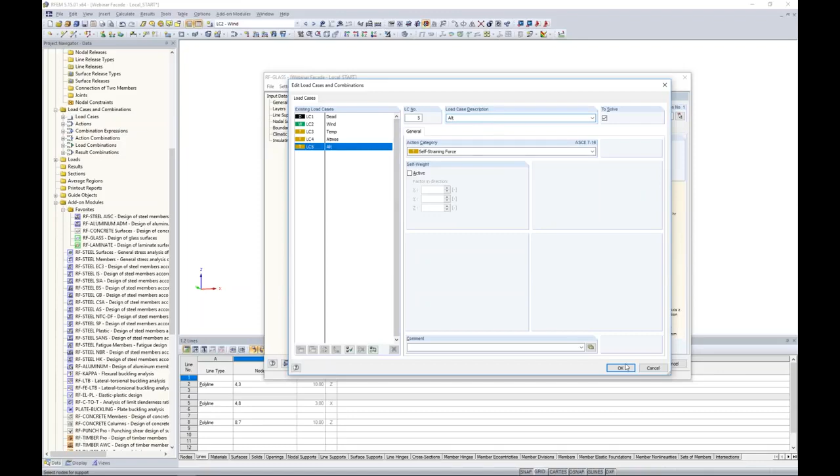So climatic load for winter now, I think we understand the idea. For the sake of time, I'm not going to fill out all of these, but we'd want to give it the same information for winter conditions.

Now, for the load cases for climatic loads, we can still utilize these same load cases that I created for summer. That's because the program is smart enough to recognize that the gas pressure happening during the summer isn't going to occur with the winter - those won't occur at the same time. So it's going to create two separate load combinations, one for summer and one for winter. That's why we can utilize these same load cases.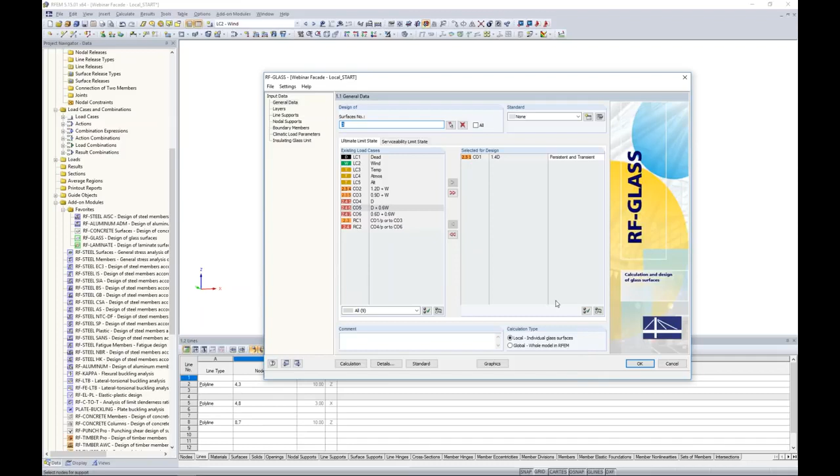So remember, I said way back on the very first tab that we needed to get back to this. Well, now I see those additional load cases here, but I don't see my load combinations generated. That's because RFEM is the program that controls the generation of load combinations, not RF Glass.

So what we want to do is quickly go back to RFEM, and all I need to do is utilize this drop down. The program automatically updates, and now here are all of my load combinations with those new temperature, altitude, and atmospheric pressure loads. You can see a much longer list now. When I go back into RF Glass, those are all available here for design.

So you can move all of the LRFD load combinations here and serviceability. If you'd like to consider all of them as well for deflection checks, you can move all of them over here as well. That's how the climatic load cases come into play and why we need to update those after the fact.

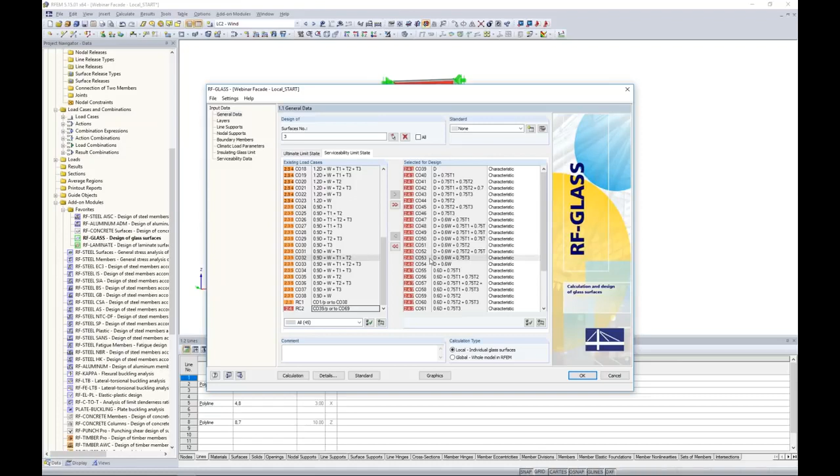Insulating glass unit - this is in regards to our secondary seal. Remember, we have an insulated glass, so we need to somehow seal in this gas layer. For this, I'm going to jump back to the PowerPoint to quickly explain what's going on. So with the secondary seal, if I were to uncheck this option, remember this entire section is grayed out.

So what's going on behind the scenes, we're going to apply what's called helper supports. Helper supports prevent pressure on the side surfaces. So what do I mean by that? Well, let's refer to this figure down here.

We have our gas layer, and our gas layer on either side has glass layers. Now, glass is relatively stiff, somewhere around 10,000 KSI. And the program will automatically model a soft material at the edges, something more around 1.5 KSI.

Well, when we apply these gas pressures, remember from temperature, altitude, or atmosphere, without those helper supports, we're going to get side deflection shown like this. So obviously this is not desired. We want to see the deflection within the glass itself, not with the soft material on the outside. So that's why we apply helper supports, which are fairly high in stiffness, so that we'll see deflection more like this with our glass panels.

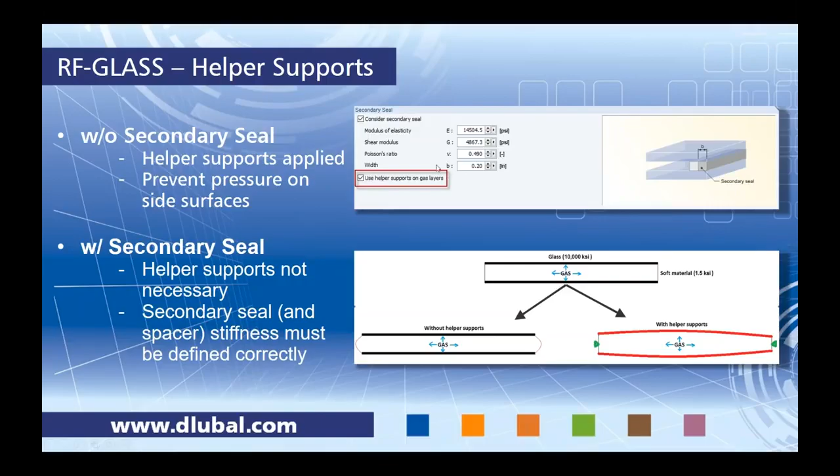Now, when we choose the option with secondary seal, so we turn this on, we give you the opportunity to define the stiffness of the secondary seal as well as the spacer so that you can accurately consider what that stiffness should be. That's why we now give you the option to turn on or off those helper supports. So if you'd like to define the stiffness exactly, then by all means turn off the helper support and you'll get the exact behavior there. For us, we're going to turn this off today, and we're just going to use those helper supports.

Now, number of finite element layers in the gas layers, this is by default set to 2. So this is according to the depth of that gas layer. You can increase that. Of course, the more you increase it, the longer your solution time. But if you have a fairly thick gas layer, then you may need more than 2.

The force load distribution. Well, here are my 5 load cases: dead, wind, temperature, atmosphere, altitude. And the program needs you to define at what percentage is applied to the external part of the glass and what is applied to the internal. Well, for this with dead load, it really doesn't matter because we only have self-weight defined. But maybe if we had some other dead load applied to it, such as a line load on top, you'd want to apply 50% to the external, 50% to the internal.

As far as the wind load, we want 100% acting on the external. So it's an outside load acting on the face of the surface, so let's keep 100% there. Now, as for temperature loads, really this is kind of up to you as the engineer. Maybe you want 50% on the external, 50% on the internal. Same goes for the atmospheric pressure, and finally, the altitude as well. We just put 50 and 50 for all of those.

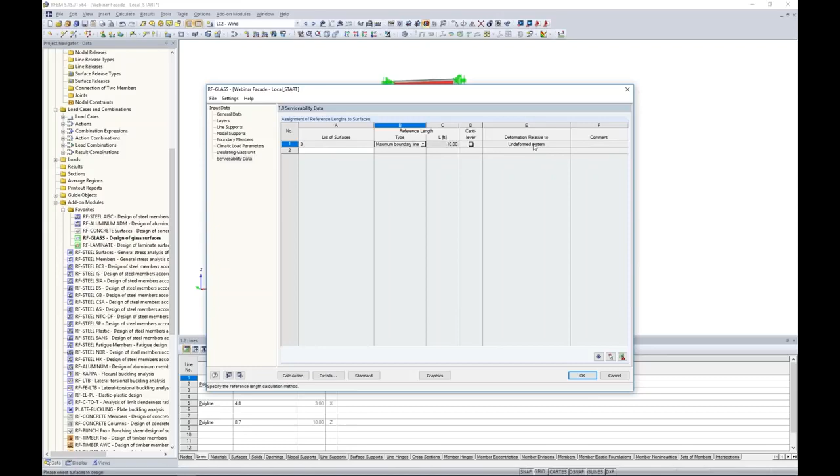So now we're finally ready to run our calculation. And as you can imagine, we now have a lot of load combinations to solve for, not to mention the program behind the scenes is creating these 3D models, generating the gas pressure. So it takes a little while to solve. So instead, I'm going to jump to an already solved model here.

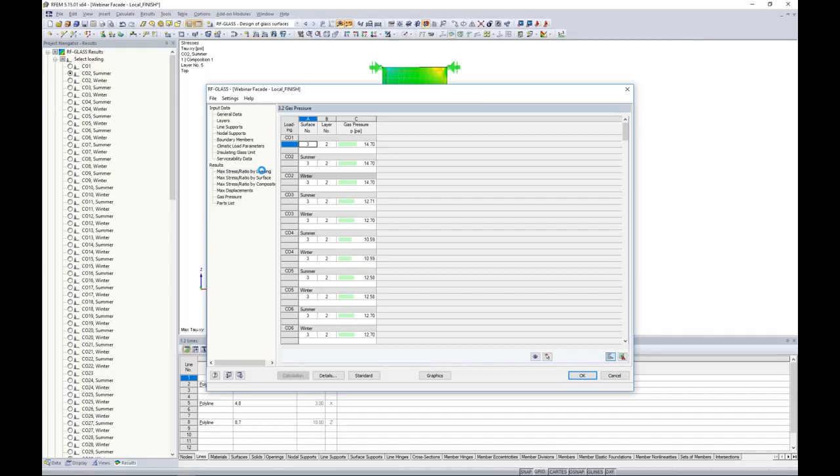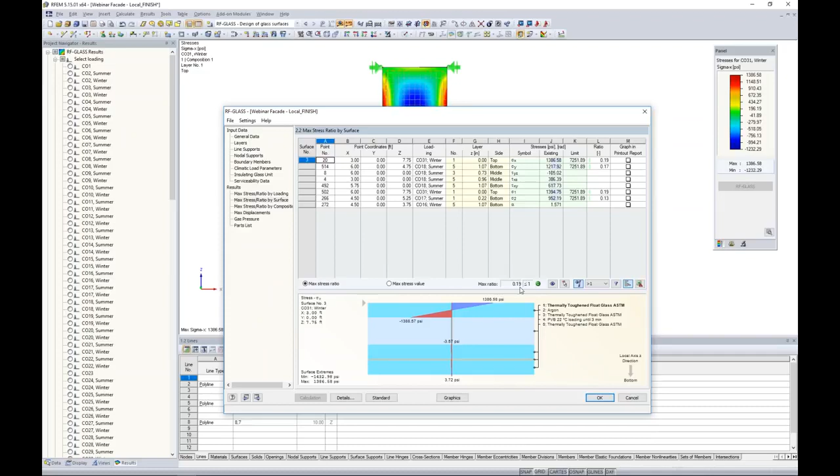And essentially, this is what would be presented to us within the glass module. This looks pretty familiar. We'd see max stress ratio by loading, by surface, by composition. So as we can see here, we only have one surface. And we can take a look at, again, our normal stresses, our shear stresses, and ultimately we're going to get a controlling ratio here for our stress design. For this one, relatively low, 0.19.

Again, we can check displacements. The controlling ratio here for a serviceability check is 0.43. And a new table would be gas pressure. So again, as I mentioned, the program is smart enough to determine that there needs to be 2 separate load combinations, one for summer. So here's load combination 2, and here's load combination 2 for winter. Same thing for load combination 3, you see summer and winter. So these are the different gas pressures you're going to see based on summer versus winter.

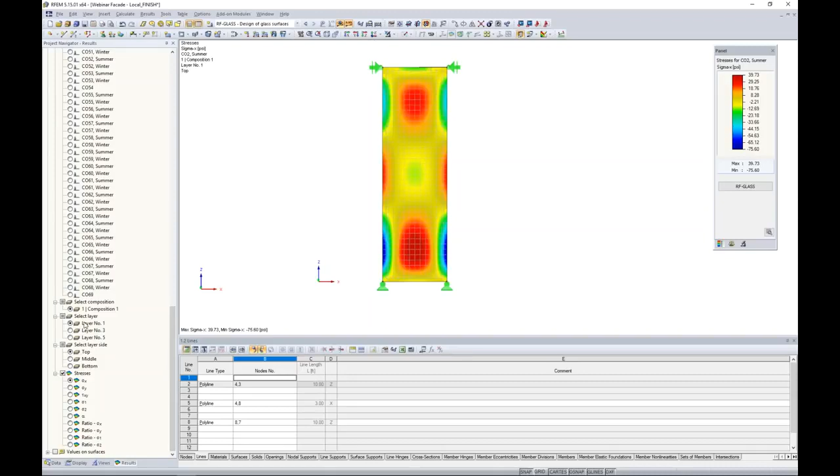Now, of course, it's always beneficial to jump to the graphics, and here is my very, very long list of load combinations. Now, this was an exhaustive list. Maybe for your design purposes, you don't need to consider all of these different scenarios, but it is possible if you'd like to. So basically from here, we're just choosing a single load combination to view graphically, and just like what we saw with our global example previously, we choose one of the glass layers. So this time we have 3 glass layers, layer number 1, 3, and 5. Then we can view the stresses for all of these different layers and all of these different load combinations.

So really, that's what I wanted to show you with the results of this local model. But there was one other thing I mentioned. I told you that we were going to save these generated models that the program's creating behind the scenes for our solid elements.

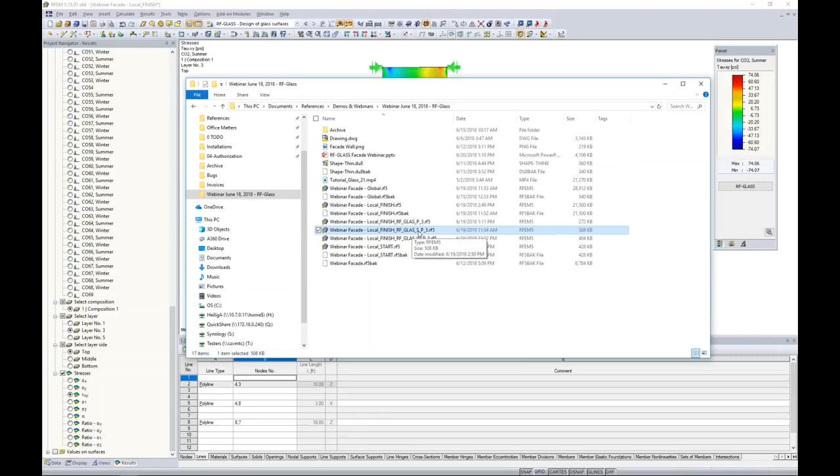I went ahead, and this is the model I have saved in my folder. The program will automatically generate three additional models. You can see it here: RF glass summer, RF glass winter, and then one with RF glass without those climatic loadings according to temperature. If I open up one of those, this is what you're going to be seeing.

The program automatically generated your exact same model behind the scenes, and you can pull it open here just like you would with any other RFEM model. So maybe jumping to the display type here, let me turn off the display of my members, turn off the display of my nodal supports, and let's zoom in here.

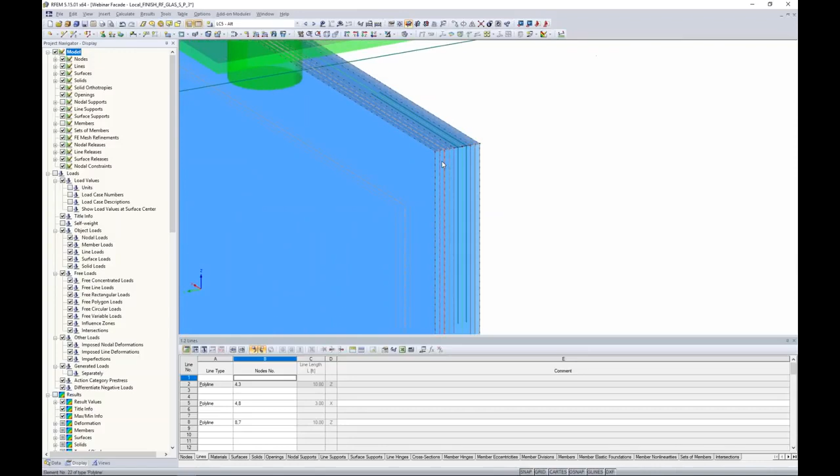Now you can see instead of a 2D surface, the program is automatically creating these solid elements to represent each layer. Here's my gas layer, here's my glass layer in the front, here's my laminated glass in the rear. The other thing you'll notice, these are my helper supports — those rigid connections the program's placing at the edges to make sure we get the desired deflection.

Again, the boundary members are shown here. Here's my custom shape thin section shown, as well as the nodal supports. Those nodal supports are defined on the individual layers that I applied them to. So this is what's going on behind the scenes.

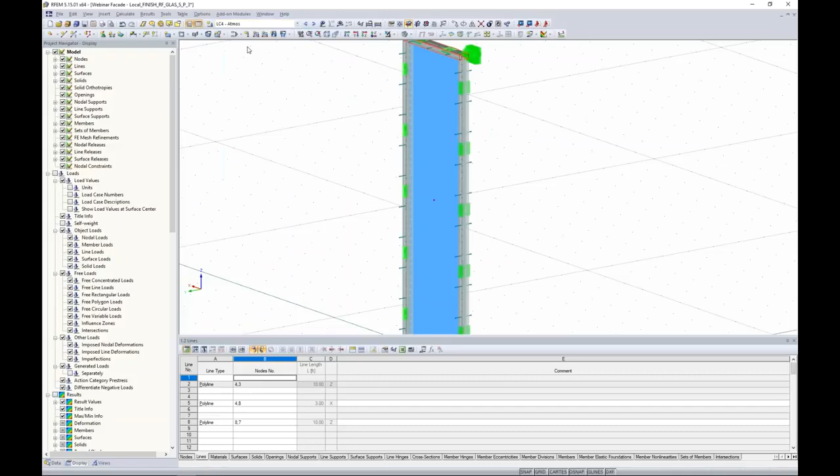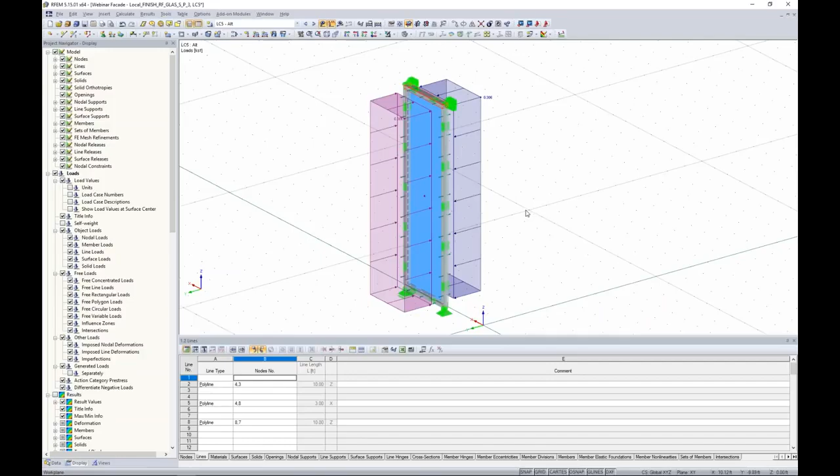And even further, you can take a look at the applied loads. We have the temperature loads and the atmospheric pressure shown here. I've applied 50% to the external, 50% to the internal — you can vary this how you see fit, but this is what the program comes up with for those gas pressures applied to the surface, applied to the solid elements based on those calculations. Same thing with altitude as well. So kind of interesting to see what's going on behind the scenes with a local calculation.